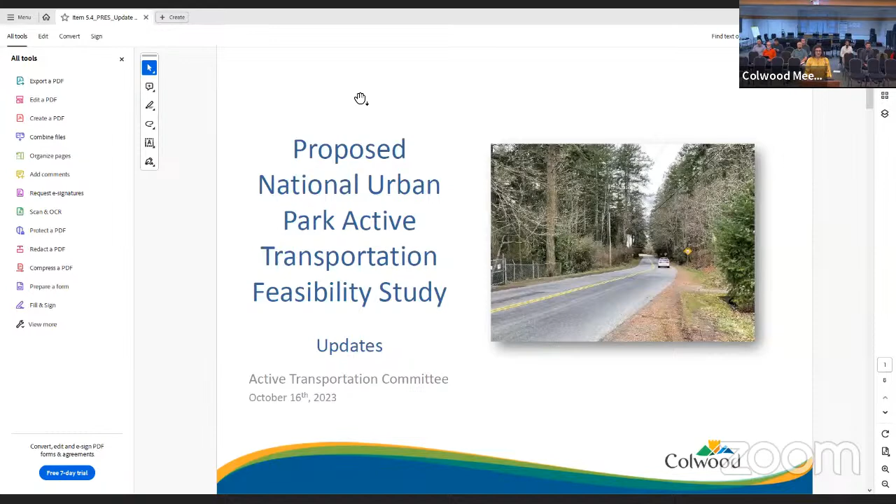Hi, everyone. I'm Nafiseh Rashidianfar, Parks Planner of the City of Colwood. We are going to give an update on proposed National Urban Parks active transportation feasibility studies. So I want to start with introducing the representative of Parks Canada, Alana Green, and Kirby Delaney from Fort Rodd Hill,

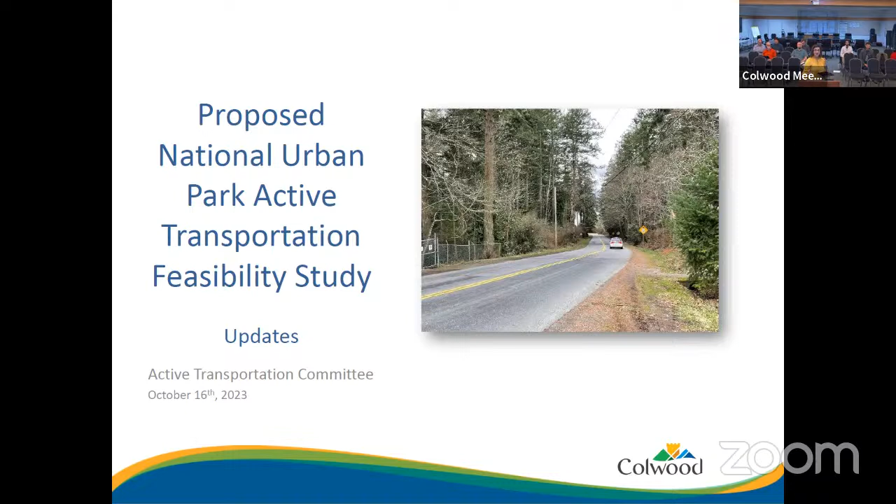and Andy Kading from Watt Consulting Group, who are going to co-present together. So I will hand it over to Alana to start with the Parks Canada National Urban Parks Initiative.

Thank you so much and welcome. Thank you so much for having me. So I am Alana Green. I am the project lead for the proposed National Urban Park with Parks Canada.

Joining with me today is Kirby Delaney, who is the establishment coordinator who works with Fort Rodd Hill National Historic Site, as well as Julia Cutt, who is a project manager with Parks Canada as we work on capital investment projects toward the proposed National Urban Park.

So the National Urban Parks is a relatively new idea with Parks Canada. We are proposing to put forward 6 national urban parks across Canada, including here in the Greater Victoria area, the Edmonton region, the Saskatoon region, Winnipeg, Windsor, and Halifax. And we have people working on these across Canada. And the idea with national urban parks is they have such potential to conserve and restore nature in cities, help mitigate the impacts of climate change, improve access to nature, protect and promote local heritage, and advance reconciliation with Indigenous peoples.

And the 3 primary elements that we're using in formation of policy and in all our work related to national urban parks are the 3 connected elements of conserving nature, connecting people with nature, and advancing reconciliation with Indigenous peoples.

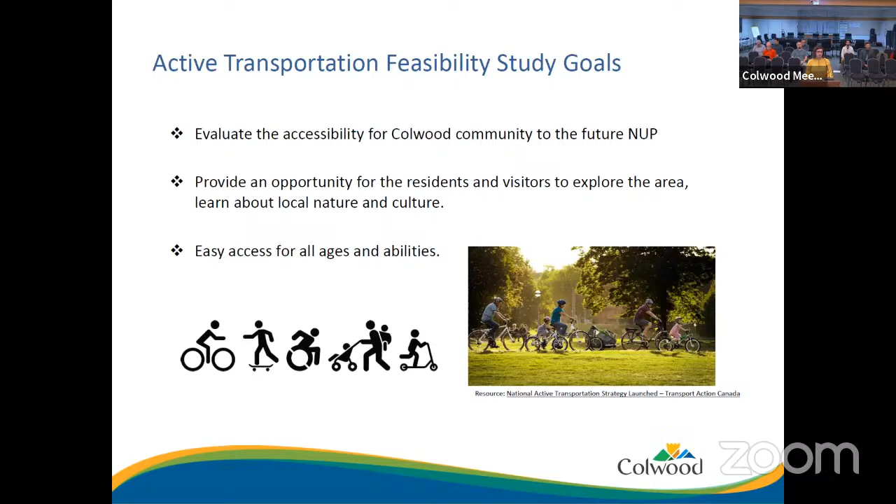So I will ask Andy to come over, and he's going to explain a little bit more about the project. Thanks. Hi, my name is Andy Kading. I'm with the consulting group.

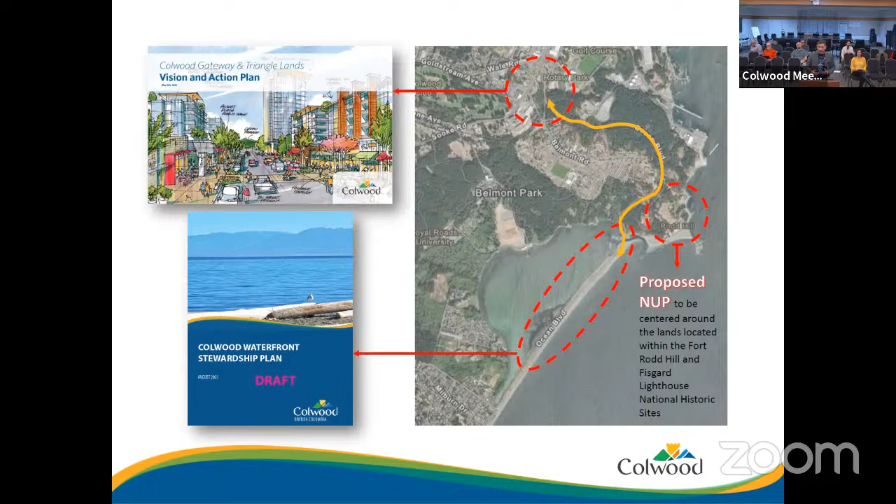So what does this connection look like? Broadly, we're talking about a multi-use path that would be along one side of Ocean Boulevard. Our analysis shows that because of the topography, it wants to be on the west side. There'll be significant savings in construction costs because it slopes away on the east side, whereas on the west side you only have to cut.

So when you're visioning this multi-use path, it's maybe 4, maybe 5 meters wide—final determination is based on further examination. It's on the west side, and it starts at where Ocean Boulevard and Belmont Road merge.

What we're proposing there is to change that triangle intersection into a roundabout. There are a couple variations: you could do a really low cost version or a higher cost version, and it would all still work. The intersection is sort of large and pretty awkward, so straightening it out with a roundabout is actually a really easy and elegant solution.

Right at that spot too, just to the west of Belmont, is where the Galloping Goose comes in. It's not shown on this map, but there's an informal connection that exists there today. By changing that intersection, you can tie that connection into what will become the multi-use path in the park, connecting the Galloping Goose directly into this future multi-use path.

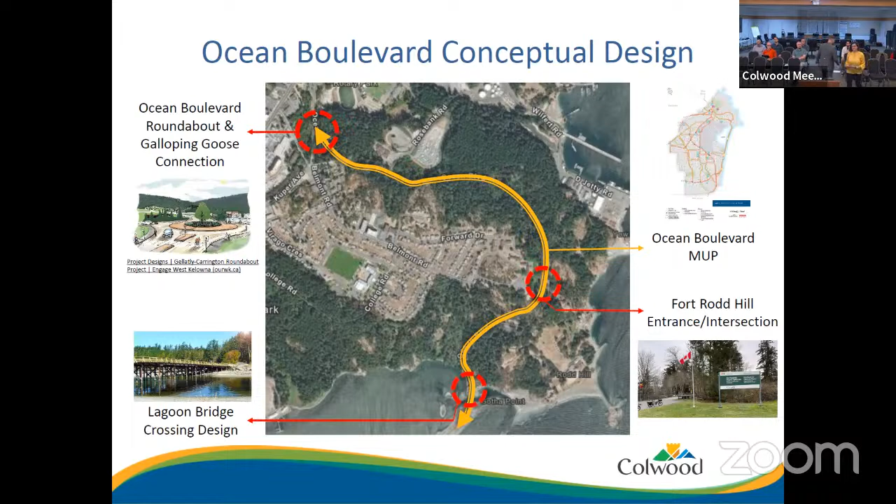So where we are at right now, we just had a lot of discussion with Parks Canada and Watt Group, and Watt has drafted the very early draft. We have the conceptual design that is under review. The city plans to finalize the draft, the conceptual design, and the cost.

We will have the Class D cost estimate. Once all three are completed, they will be provided to the city for approval prior to being submitted to Parks Canada. Ultimately it will be one of the shelf-ready projects for grant application. That's all for tonight, and thanks.

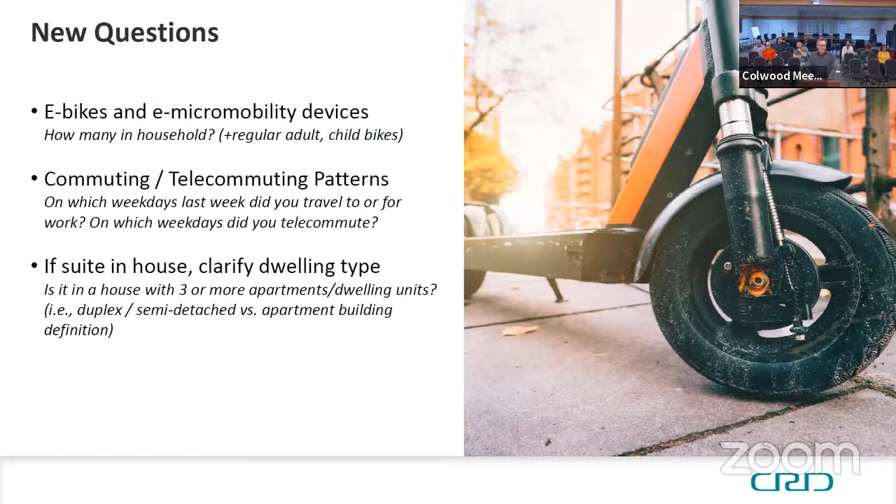We also added a number of supplemental questions. These questions were largely aimed at equity. They didn't go out to everybody; they were done in a supplemental survey. I believe we got to about 65% of the actual respondents, and they were focused on housing tenure, access to electric charging stations, and household incomes. We wanted that data so that we can do some cross tabulations, as we're aware that equity is becoming an increasingly important way of reporting back and informing decisions.

I'm now going to walk through some of the key findings. Firstly, I'm going to start at the regional level, and then I'll move on to some of the more local level in terms of how it impacted Colwood.

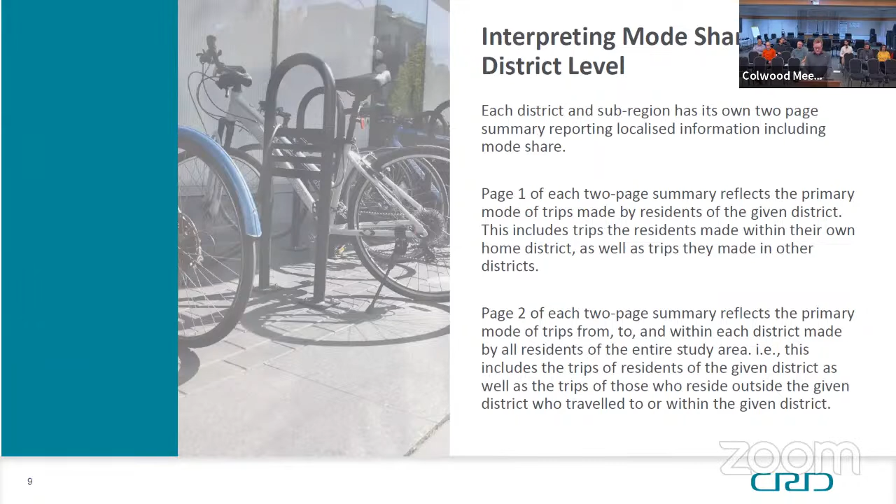I'm going to go through and give a bit of a talk about some sub-regional flows and internal trips.

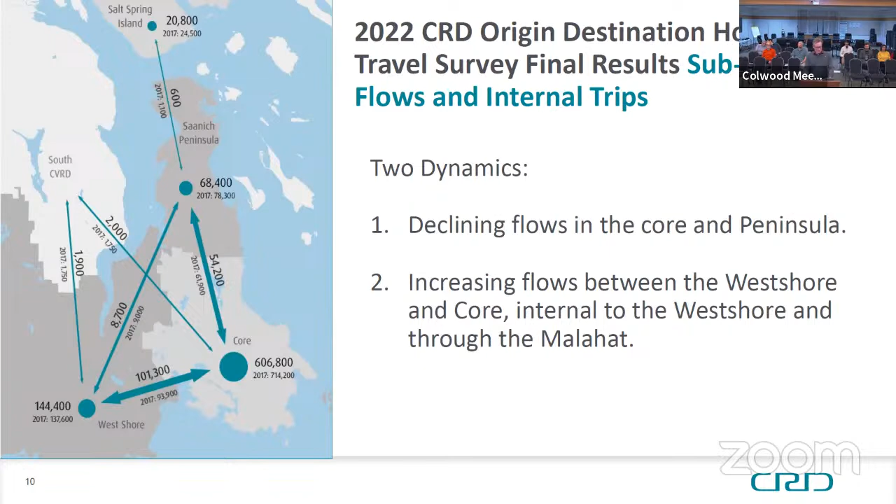The regional mode share targets. We have regional mode share targets of approximately 15% for transit, 15% for cycling, and 15% for walking, just as the majority of our municipal partners now have. At the moment, as per the last survey, the 2022 survey, we've reached the 15% walking target. Transit is sitting at 6%, and bicycles and e-mobility are 8%. That shows a 29% uptake on our 2038 target of 45%.

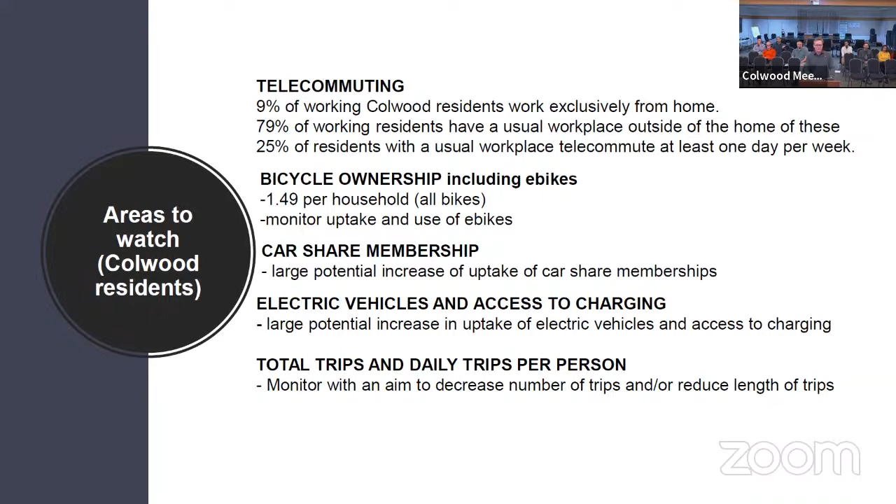Thank you so much, there's a lot to digest there. I had a couple of things, but why don't we start with committee - anyone want to chime in or ask a question?

I'm betting the Lacey household has more than 1.4 bikes. That's true.

Anybody else? Perfect, I think it's all very self-explanatory. One thing I found interesting was the number of internal trips within our community - people starting in Colwood and finishing in Colwood.

Did it have a line on there about starting in Colwood and finishing in the West Shore in general? Yes, we do have that information. As we can cross tab nearly any of the data, any of the questions we can cross tab to get more detail.

I assume everybody that's getting in their car is heading into town, but clearly a large portion are ending their trip here in the West Shore. I also find the single digit use of transit not surprising given the concerns we have as a community with some of our poor transit services. So I think there's lots of room for improvement in that area.

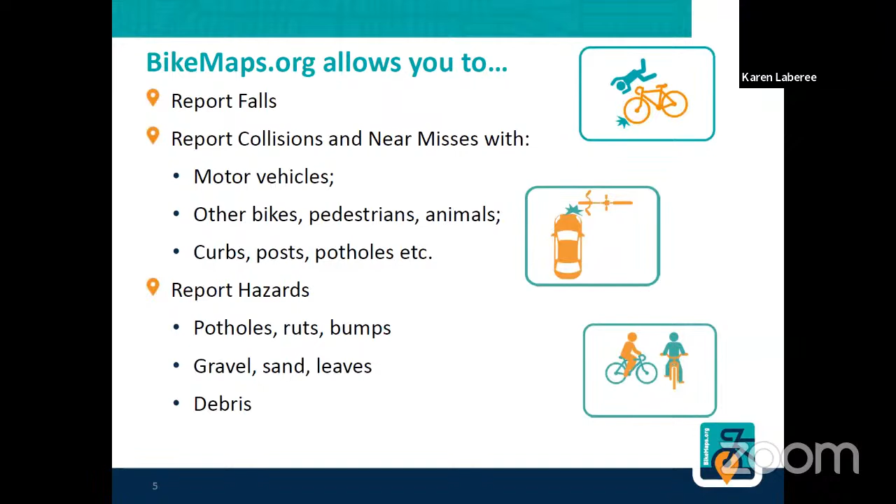You can also report falls or collisions with posts, so some of the bollards, potholes, curbs. And you can also report hazards that you encounter as a cyclist on the road, so potholes or gravel, sand, and debris.

A lot of these reports were based on our promotion efforts, which we've been undertaking since 2014. We've spent many hours out in the community at Bike to Work Week, which is now called Go by Bike Week. We used to do pop-ups with the CRD and Saanich Bike Patrol on the regional trails.

We've given talks like the one I'm giving tonight to community groups, and certainly used social media. We've tried to get the word out, and the reports kind of ebb and flow over time, but it's really about getting the word out to let people know that they can report on the site.

If a municipality, like there's a lot of data already on the site for Colwood, but if you did want to really focus on gathering reports for Colwood, letting people know that you're paying attention and looking at the site helps close the loop. People feel like somebody's paying attention to this, and they'll be more incentivized to actually report things that have happened to them while cycling.

Over the course of the almost 10 years we've been out there, say over the 5 years with Bike Maps, we would often get asked to do something for the pedestrian environment. People would say, I'd like to be able to report places where I was walking and had an incident, or places where the snow isn't cleared, that sort of thing.

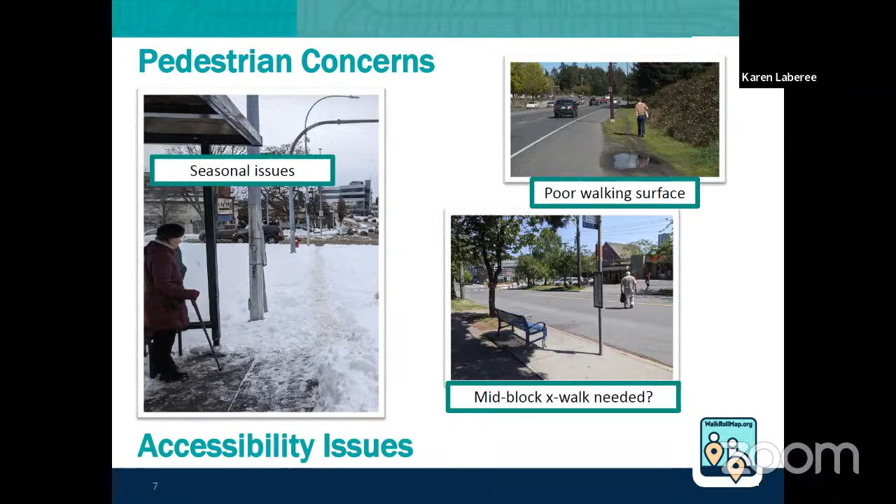Part of that is really making sure that we're including accessibility issues. The 'roll' in Walk Roll Map refers to people using any kind of mobility devices.

The goal of Walk Roll Map is to fill a data gap similar to Bike Maps, but this time with the collection of microscale barriers to walking or rolling, using crowdsourced mapping. This research project, funded by the Public Health Agency of Canada, aimed to work with community partners to reach diverse people of all ages and abilities. We knew it would be a challenge because unlike cyclists who tend to group together, the people who could report to Walk Roll Map were essentially everybody. They're less defined and don't self-identify as much as cyclists do.

As you can see, there is a fair bit of data on Walk Roll Map around Colwood and the West Shore. We have three different types of reports you can make: you can report a hazard or concern, suggest a missing amenity, or report an incident. Similar to Bike Maps, this would be a near miss, a collision, or a fall.

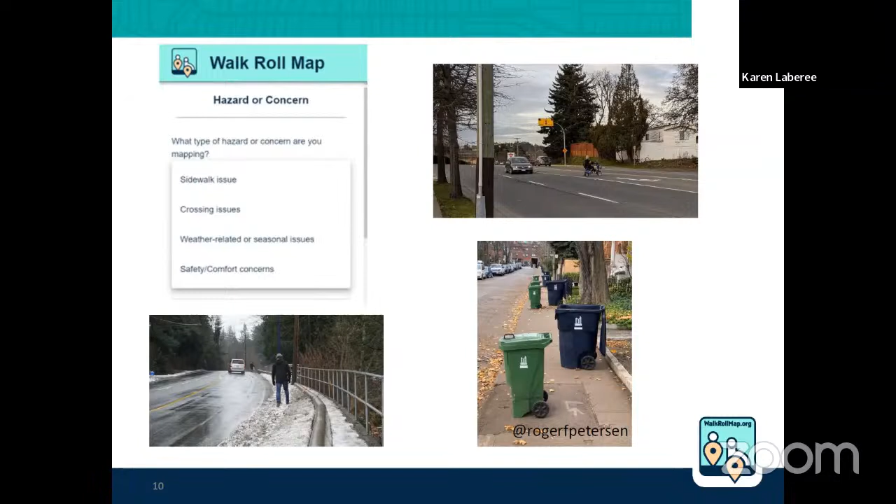For the hazards or concerns, we've grouped them into four different categories, trying to make it as intuitive as possible for site visitors. There's a bit of redundancy among categories, just in case what you thought was an issue didn't fall into the same category we did. We grouped them by sidewalk issues, crossing issues—places where a crosswalk is needed or there's a problem with the crossing—weather related or seasonal issues, like ice, snow, or leaves on the sidewalk, and finally safety or comfort concerns, including personal safety, like lighting that isn't great in places people need to walk, which is less about traffic safety and more about personal safety.

The other category, which is a bit different from Bike Maps, is the ability to suggest an amenity. We included this because we recognize there are a lot of extra things that make walking possible for some people. This could be a bench that allows people to connect with their neighbors or just gives them a place to rest, or it could be a washroom, a water fountain, wayfinding signs, or shade in the summer.

When developing Walk Roll Map, we undertook a series of interviews with planners, council members, and members of different organizations across Canada, just to see what sorts of things we should ask about or have the ability to map. This amenities list is really the product of those interviews.

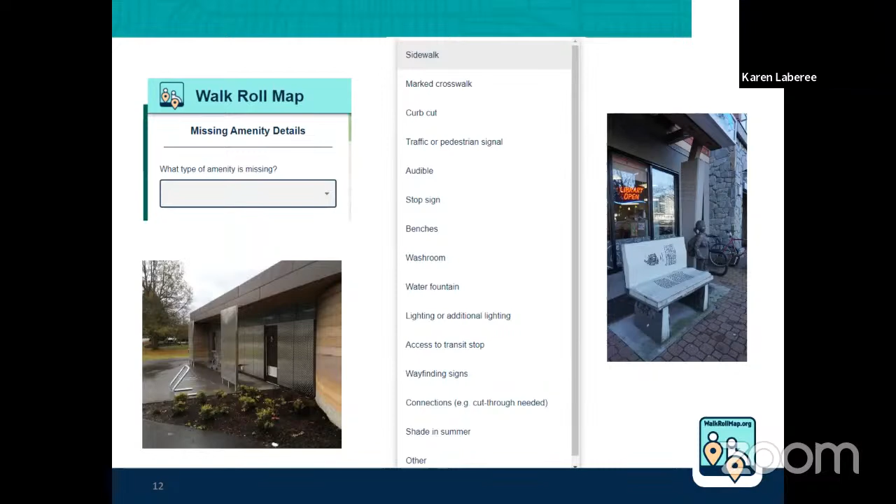Finally, the last type of report you can make is to map collisions, falls, or near misses. Falls are something we'd really like to get a handle on—it's challenging to understand how many falls actually happen on streets and in the public realm as a pedestrian. Hospitals don't have that kind of nuanced data, so we don't have a good idea of where people are falling and how much injury results from falls. This is something we as researchers would like to understand better, and for municipalities it's obviously nice to know where these incidents have been happening.

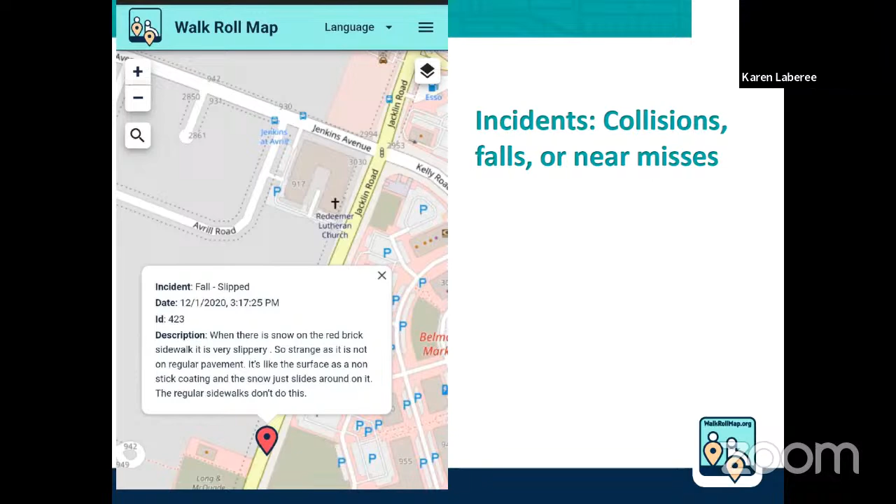So just to sum up, the benefits of Bike Maps and Walk Roll Map are that they're easy to use and immediate—as soon as someone reports something, it's up on the site, and people can do this at any hour of the day. They don't have to wait for a public feedback session. It's a great way to keep ongoing track of hazards or issues for free for municipalities. You can track any new active transportation projects you've developed, since slight adjustments are often needed after introducing something. It helps identify local issues, like the deer example I mentioned before—an oddball thing for the region, but it shows how sensitive this tool is to locally specific types of incidents.

And then the data can be used to support active transportation planning, and just, as I mentioned, the surveillance. And then from our perspective, it provides data for research on bicycling safety, public health, pedestrian safety. So the data on bike maps, we are happy to provide it to you. You just have to get in touch and let us know.

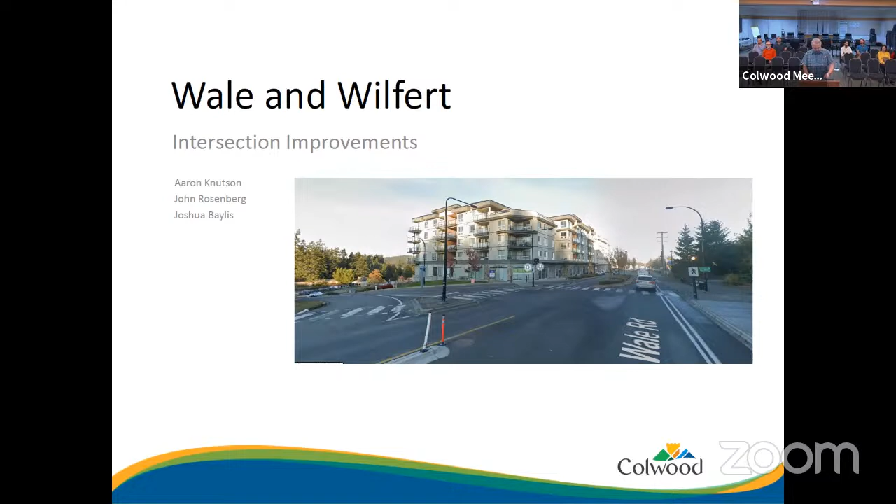So just a little background on the current existing construction of the intersection. It's what we call an untraditional, unstandard T intersection. We have the two slip lanes that come off of Wale and onto Wilfert that do create some challenging crossings for pedestrians and cyclists. It also lends towards higher speeds for some of the vehicles coming off of or onto Wilfert. We also have some challenges with some of the queue lengths currently, around 2 to 3 car lengths.

The transportation assessment that we received for a project in this area spoke to lengthening these queue lengths quite drastically, especially when considering the future growth of that area with the gateway visioning. And you can also see from the image here that there's some disconnection with missing pieces of sidewalk, and obviously the multiple crossings you have to go through if you're on the Galloping Goose trying to commute through that intersection.

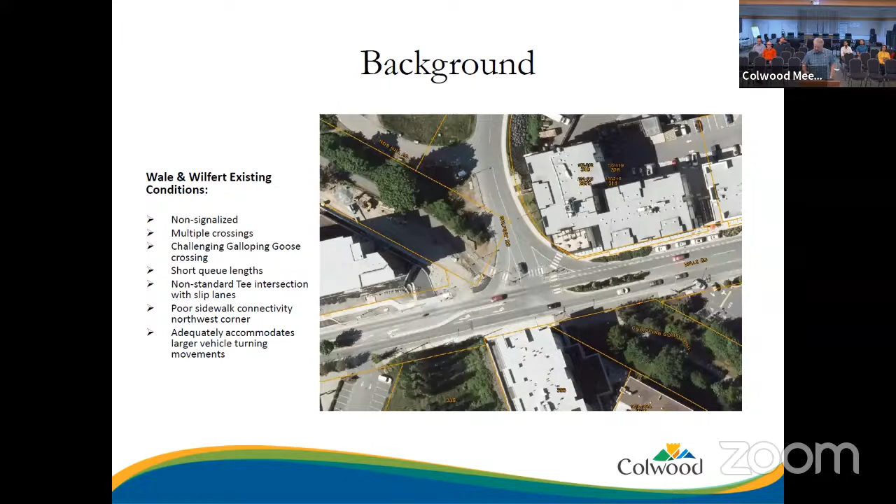We're still keeping the traditional crosswalks for pedestrians if they choose to use that route. The intersection will become fully signalized, which is a huge bonus upgrade, since right now it's just a single stop on Wilfert.

We'll also be adding a significant amount of protection to the bike lanes that are there now. It's a bit more of an infill measure because the roadway is mostly established through previous developments, so we're looking at more of the concrete barrier with pickets to provide a bit of protection and separation from the cars.

We're also looking at creating better mixing zones for where the Galloping Goose meets the sidewalks, enlarging those areas and giving them a bit different treatment.

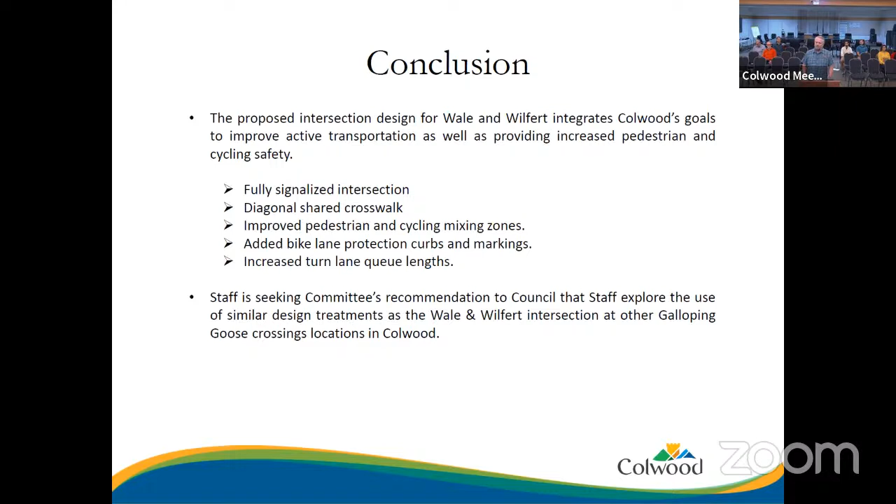I'll repeat our ask: that staff is seeking the committee's recommendation to council that we look at using similar design treatments in other Galloping Goose crossing locations in Colwood. Thank you very much, I'll be here for questions, and John Rosenberg, our director, is also here to assist with any questions.

I'll bring that back to committee. Who wants to go first? Haven't heard from. Go, we're gonna start down there.

Thank you, great presentation. Just a small question you might be able to answer. The Sooke and Aldine area, I think it's out of scope for this project, but I want your confirmation. Across the road is in Royal Roads, I think it's their land proper, I don't know if it's the city of Colwood. And the bike lane there gets really close to an existing structure. Sight lines for oncoming people from the Galloping Goose are very low. So I'm just wondering if that could be considered when that project is done, or whether it's a bit out of scope because it might be across another city boundary. Thank you.

Yeah, I would say that as part of this presentation or these proposed works, it would be sort of out of scope, yes. However, if we're asked to look at using these types of treatments in areas such as Sooke and Aldine, then that would definitely be a consideration for improved safety and connectivity. So it would be out of the scope of this project, but hopefully in the scope of a future project.

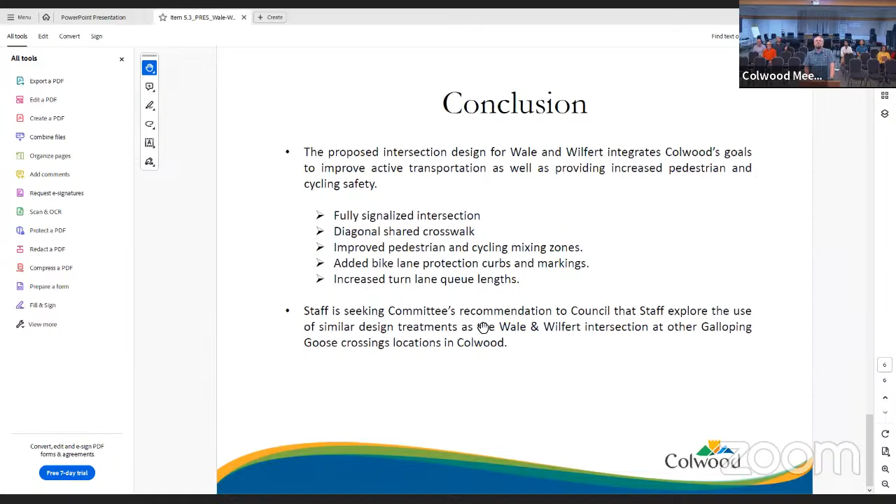So as I understand your question, you're speaking of the right turn lane that goes from Wale onto Wilfert. Yes, we had definitely some challenges with this intersection due to the constraints we're dealing with, because 3 of the 4 corners, almost all 4, have been developed. We had to work with large turning radiuses for the vehicles that use Wilfert Road currently, in particular Columbia Fuels. So basically we were able to shrink the intersection to provide that protection you're speaking to, and still provide the turning radiuses we needed. That's why we looked at implementing the curb barriers and the green paint, which I understand is just paint, but at least it gives a higher level of visual cue.

Yeah, I mean, there was even challenges in getting the right turn lane there at all, because there's some grade challenges with the current building that's there now and the sidewalk adjacent to it in front of it.

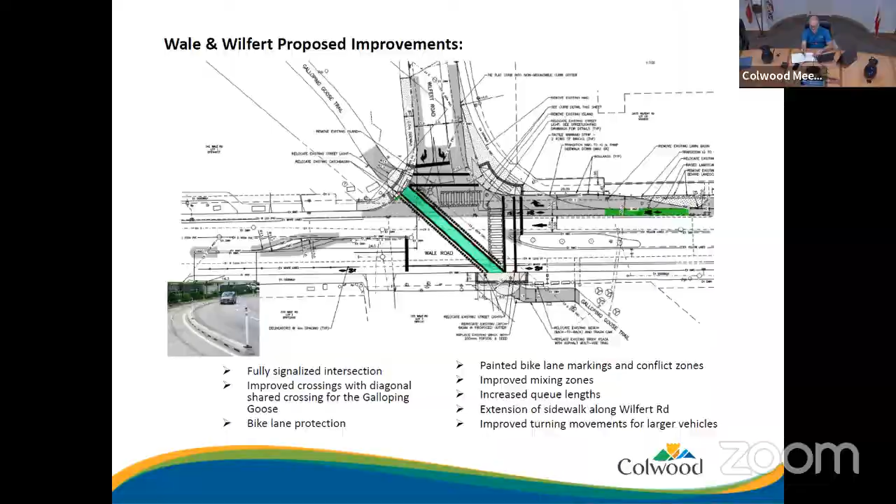Yeah, potentially. I mean, I actually should have mentioned that as part of my presentation, and you spoke to it a little bit with the bikes and having their own phasing or such. We are looking at having the addition of bike designated sensors, which is supported by CRD. We consulted with CRD about that type of technology, whether it's the hockey puck or the circle in the asphalt or other type of push button. But you're right, potentially a scramble at that very busy intersection might be what we're also going to look at, specific signalization or timing of the intersection of Wale and Wilfert as well. It might be like a hybrid scramble to safely have bikes cross and pedestrians cross and then allow the vehicle.

Okay, interesting. Yeah, I take it the T intersection, everybody's going to be stopped anyway, so not quite the same at those. And this discussion is timely as committee and the community has heard that we're headed for a new pedestrian and cycling bridge a short distance away from here. So it behooves us to think about this area here. And I know Mr. Lacey raised some points about the general flow of traffic and pedestrians and what have you in that short stretch there.

And Tyler. All things sidewalks. Yes, all things sidewalks. Hello everyone, my name is Tyler. I work in our engineering department as well. Seen a lot from engineering today. I'm our engineering capital projects lead. Tonight I'm here to speak to the active transportation sidewalk projects.

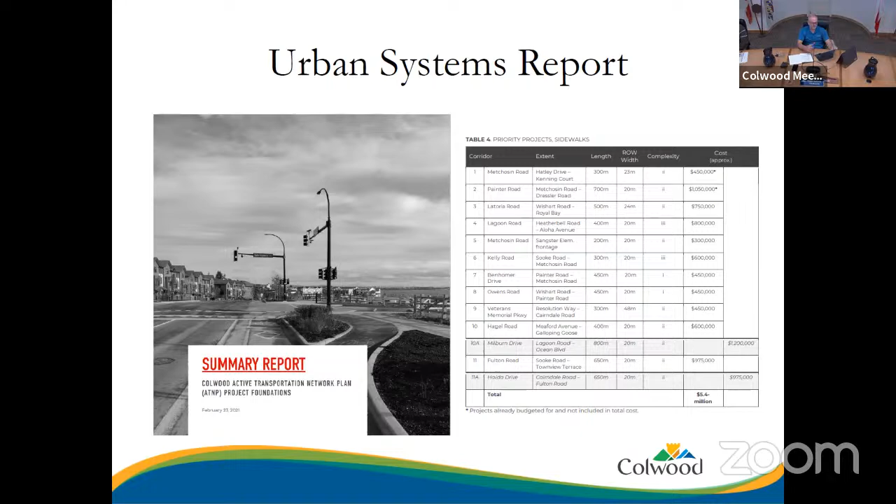To provide some background, in spring 2021 Urban Systems was engaged to do an analysis of our 2006 active transportation plan, official community plan, and transportation master plan. As part of this summary report, they identified priority sidewalk projects and bike lane projects. This was taken to council, where a decision was made on which active transportation projects to prioritize in the near term. Two of these projects are now complete — the Benhomer and Owens project — and four remain, which are now in the design stage.

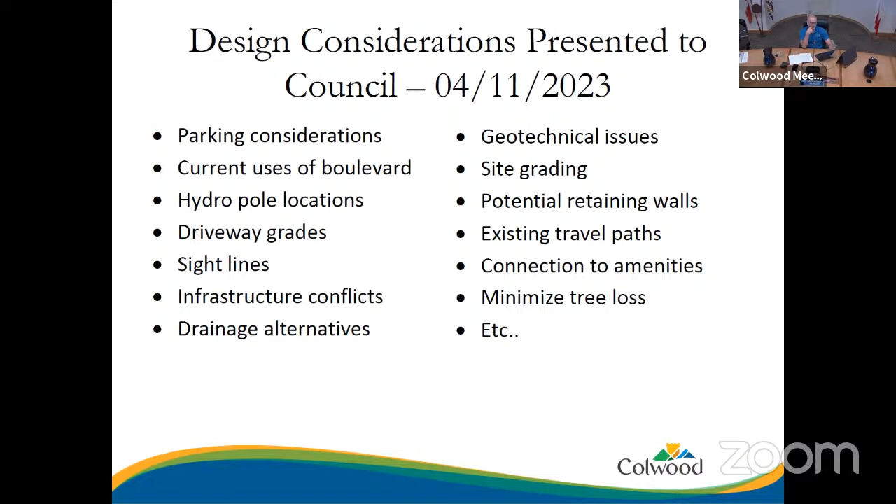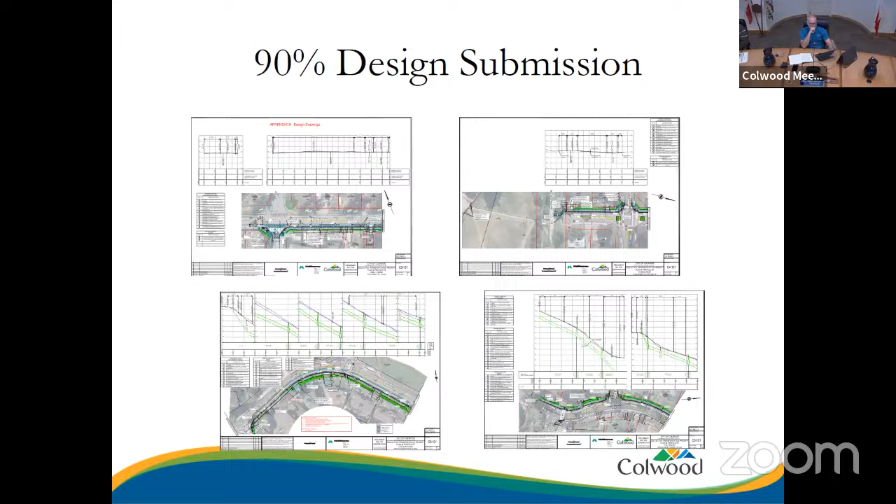In the spring of this year, we took the preliminary designs to council, where we provided some design considerations. At this meeting we presented this and took feedback from council and implemented it into our now received 90% design submission. So tonight, as part of this report, we've attached these 90% design drawings, and it's a great opportunity for the committee to provide some comments on the designs. I'll speak to some of the design considerations relevant to the new designs as well.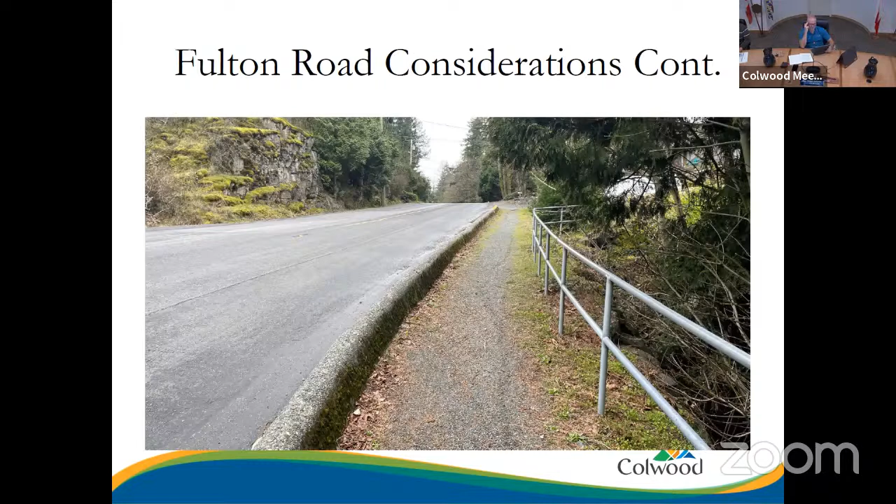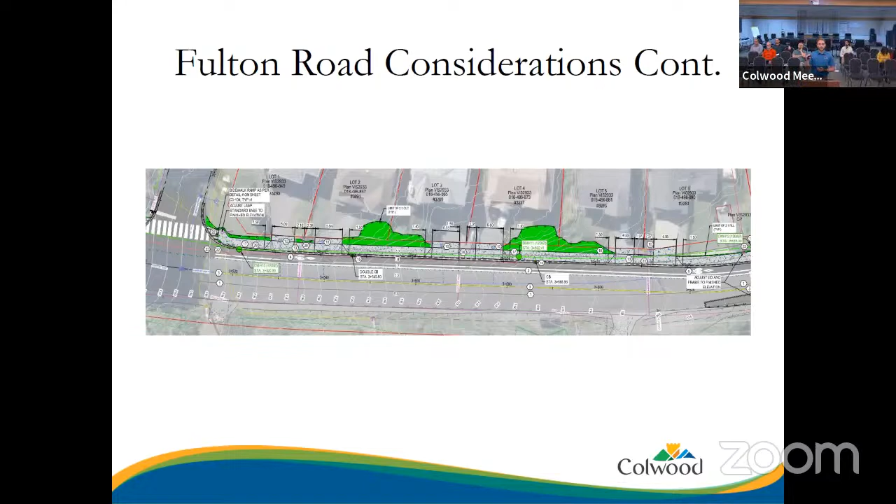Further down, as you can see by the green in the drawing, this is an example where in order to match the new proposed elevation of the sidewalks, significant fill would have to go into the properties to meet that grade — so this is where we would need retaining walls. A better picture of this is the same area, where a consideration can be put forward to instead keep this existing sidewalk and not need these additional retaining walls. This is again part of some design considerations that council or committee can consider for cost savings.

These are also some project metrics we're presenting tonight in an attempt to prioritize certain aspects of these projects. These metrics use the updated information from the 90% designs, and this is something committee can provide feedback or comment on — in terms of the importance of these metrics, the prioritization of the projects, or if there are additional metrics that could be considered. That's it, thank you.

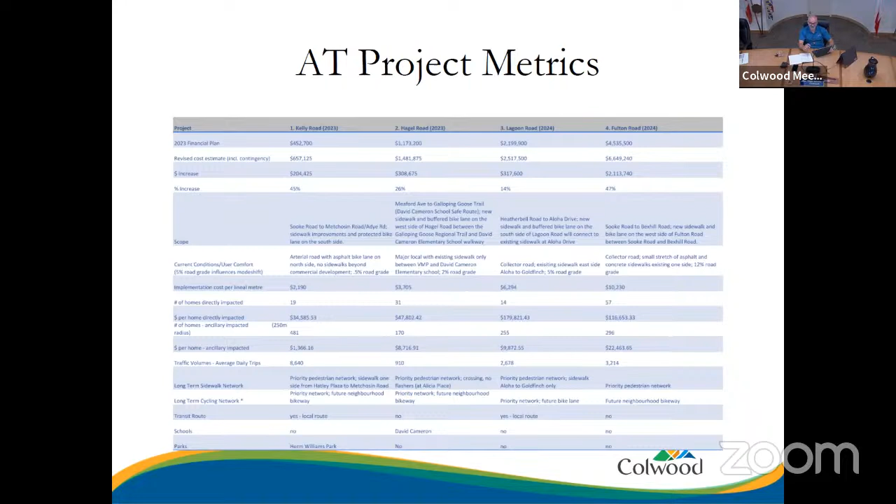Thank you, Tyler. I'm looking at the metrics here at some of the costs that have dramatically increased. Don't go anywhere because I'm betting there's a handful of questions here. Go ahead.

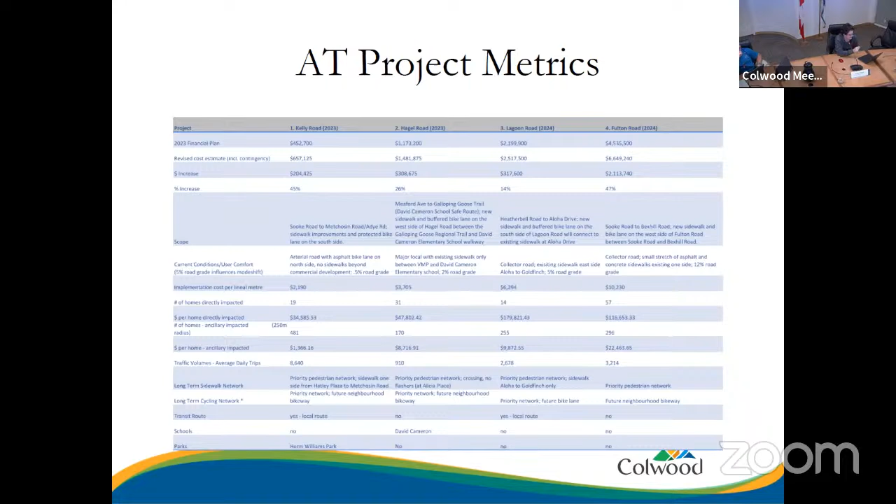Amanda, can I share you a small slideshow of some of my comments? I thought it'd be easier to just draw it on paper rather than trying to explain it. Go ahead and email it to her, and then we'll come back to you when she's ready to go.

So is this report something you are preparing for the first time, or is it one that you already do on a quarterly or monthly basis? The sort of projects that you're working on, cost deviances, et cetera—just from my own understanding.

Yeah, for sure. So we wanted to get back in the second slide there, council's input at that stage for when we're going to the next design. Now that we're at this 90% design stage, and as the chair has spoken to additional cost measures, we want to come to council or committee first, and then to council, to provide them these additional costs and get some feedback on prioritization of the projects.

So it isn't an annual thing. It's more prompted by the additional progression of the design stage. My question is, based on this, I think something like this could be a standing agenda item for the active transportation network committee meeting—every quarter we get an update on the projects as planned and how they're deviating from plan, either in cost or timing.

I think it was just perfect timing, because I was at another organization and I bring information on what we learn at the active transportation meeting to that committee—that's the Scenic Citizens Environmental Network. And one of the asks was a regular update once a quarter on what are the new upcoming projects, what are we starting, what are we finishing, what are we continuing. I think that's what this is.

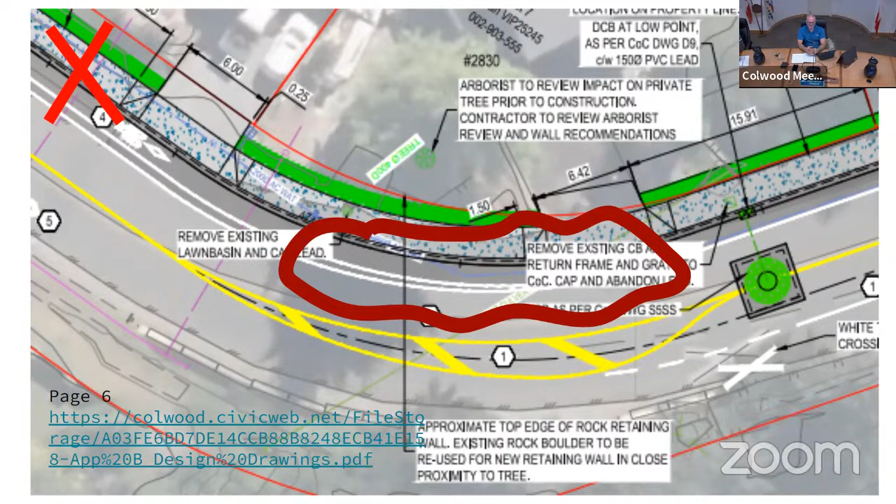So this is unfortunately a spot where we did have to make some sacrifices, and the vertical cones don't take up the volume or width that other measures do, but it's something we're going to consider. It doesn't necessarily have to be the full one meter there, but at least a small, few-inch concrete divider to give a large visual barrier for a do-not-cross kind of thing.

Could you go to the next slide, please? And then the next one after. Okay, thank you. There's a lot of these ones where it's like side road things for small residential streets and whatnot. I noticed this one doesn't really have a zebra crosswalk or yellow tactile pads on each end, and the zebra crosswalk here is missing, giving the false idea this is a place for cars, not for people.

And with this supposed to be like a stop sign, drivers often just do a California roll right through there, particularly when it seems very inviting for them to do that, which is a bit of a concern.

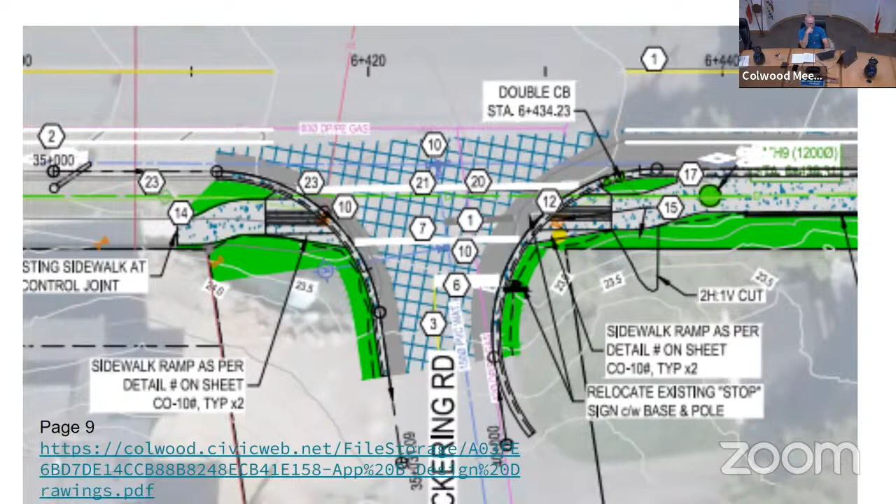I have a link to one study on the next slide. Also, when a vehicle does hit a person, it's often a lot less serious and deadly, which overall improves safety considerably. Even if it's not raised to keep the continuous sidewalk level, just making it at ground level with the car, with different colors and materials, really gives the idea to the car that they're a guest in this space instead of it being their territory, which also has many safety benefits.

Next slide. There was one example I gave in a past presentation a few years ago. There are many more now being implemented around North America. But in one street in Cambridge, pedestrian crashes with cars went down 45%. The amount of times a vehicle yielded to a pedestrian went up over five-fold.

So these things do have serious, really good benefits. I was also often told about considerations of emergency response vehicles. That is a situation.

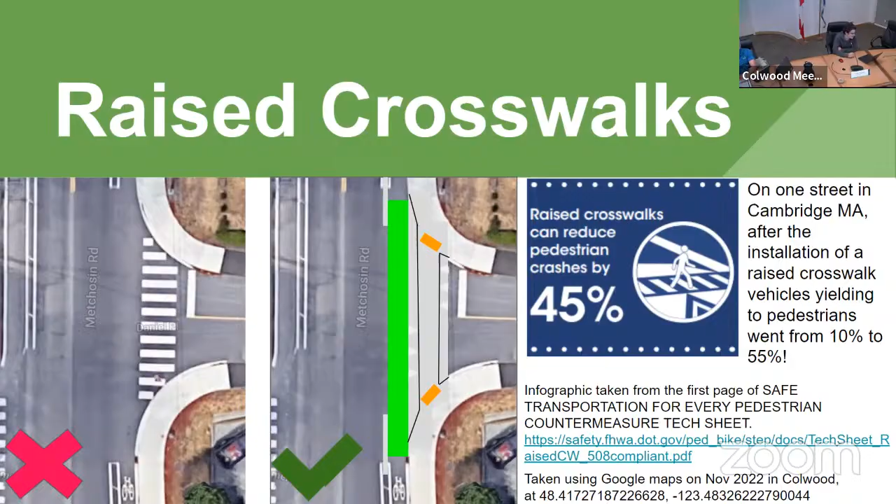Like by my school, we used to have a zebra crosswalk. They went out of their way to rip it out, which is rather interesting. But for example, crosswalks should have pedestrian islands, the yellow tactile plates to help visually impaired people. The conflict zones, when they do have to actually happen, should be really marked green, the elephant footprints, but mainly zebra crosswalks and really visible pedestrian islands.

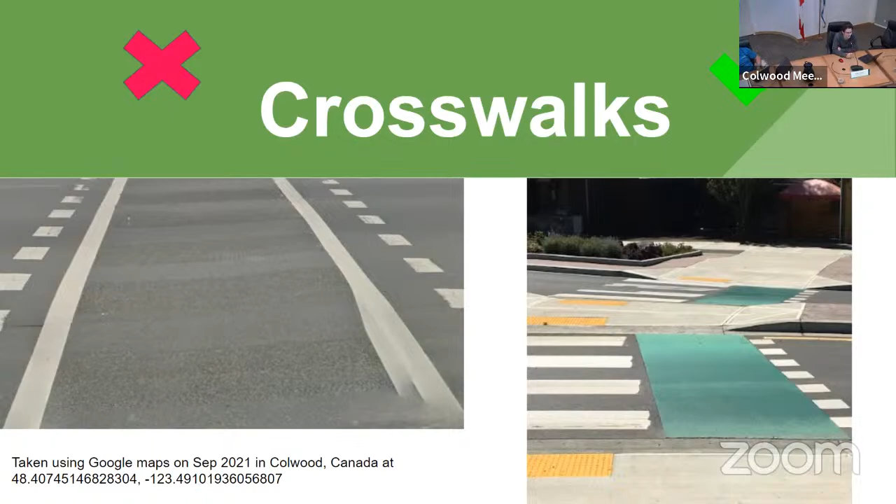Next slide. This is a typical road design we have in Colwood. I brought this up in past ones, but it's something that gets brought up in a few of the roads, like Kelly. I know Fulton has really constrained issues, so it's not really doable. But on many other areas in Colwood, this is a typical design.

Next slide. What could be done is in some places they just move those two buffered bike gutters and put them both together on one side and just put planters. It gives the gold standard bi-directional bike lane that has much more space, safety and convenience to people. And people often use these bi-directional ones compared to the single ones. So it's just a design consideration at times.

Next slide. And then there's just some odd sources I threw in there for if you wanted to look at some stuff. Thank you, Amanda.

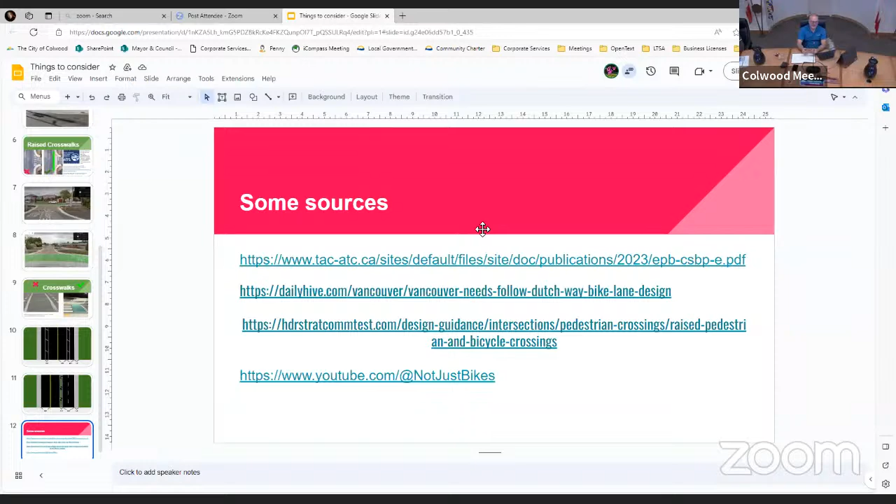My only concern would be some of that is very idealistic in nature, and really some of these are very constrained locations as far as cross section goes. So really it's difficult to come up with a gold standard for the entire community, when each road we discussed has its own challenges, as Fulton Road for instance, with the...

Good, so I do have some thoughts, and I would like the committee's input on this. I look, Tyler, at some of the costings here, and I noticed specifically the Fulton Road challenges in Fulton Road - maybe you can discuss that.

Well, I'll give you my questions. You know, some of the costs, it seems quite for what looks like - on your matrix you talked about homes that were impacted. Can you explain what that is? Impact how? I'm assuming that's construction, is that right? It's more so the homes that will have the direct use of these sidewalks, for example fronting. And then if I could draw attention to the ancillary impact.